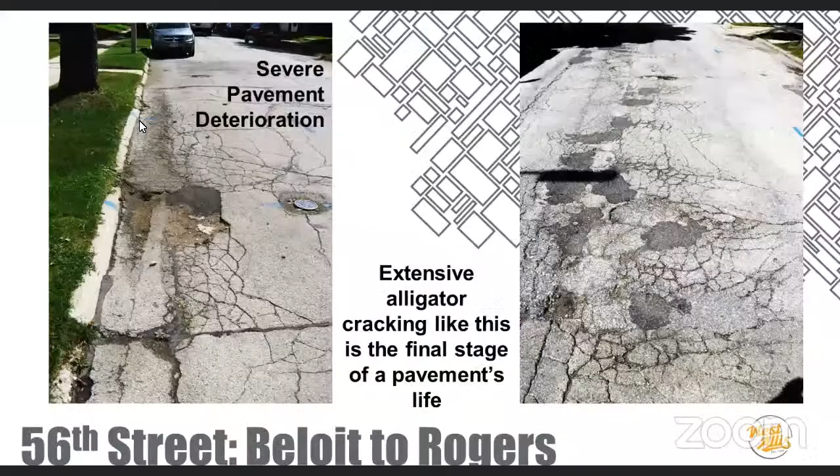Resolution to confirm and adopt the report of the city engineer containing the schedule of proposed assessments for improvement of South 62nd Street from West Washington to West Greenfield Avenue and South 56th Street from West Beloit Road to West Rogers Street by concrete reconstruction with miscellaneous walk repair, storm sewer relay, sanitary sewer relay, water main relay, building services, and utility adjustments. Thank you, and we'll turn things over to Pete Daniels.

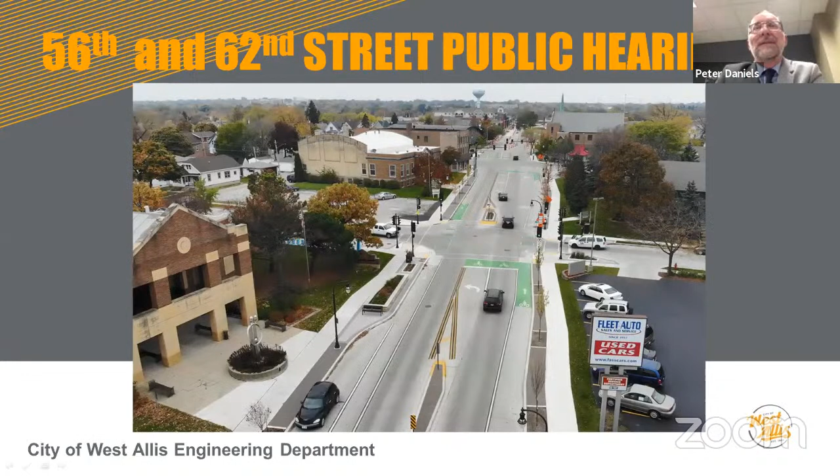Thank you, Mayor Devine. Okay, this is the hearing for 56th and 62nd. Here are the limits for 56th Street from Beloit on the north to Rogers on the south. We're kind of jumping over the top of Burnham, but there is some sewer work that will go through there.

And then the other one, 62nd Street from Washington to Greenfield. We're not getting into the Greenfield intersection, and actually Madison is new, so we're jumping over the top of that, but we're doing those 2 blocks.

This is a picture of the concrete on 56th Street that was put in 1927. This picture was actually taken in 1949, so at this point the road was only about 22 years old. At this point, the road is now 94 years old.

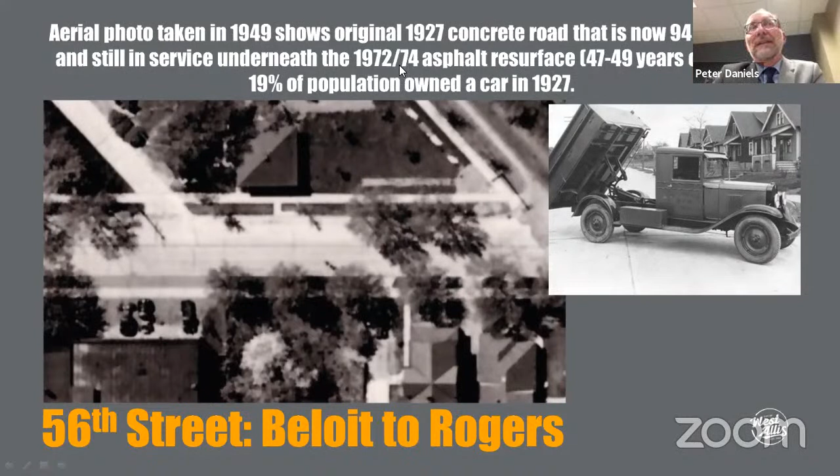That concrete that you see in this picture is still under there, and there is a layer of asphalt from 1972-74 that's now 47, 49 years old itself. So I just want to stress, this pavement that you see from 1927 is still there.

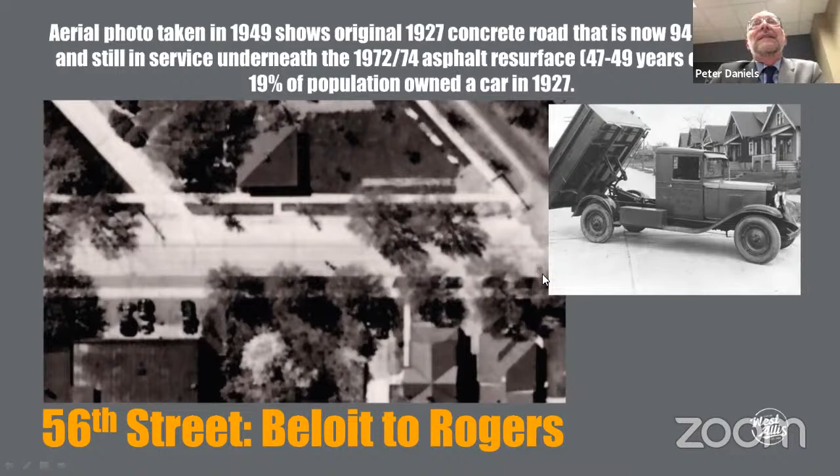Just as a point of reference, only 19% of the population on this street probably even had a car in 1927. And if they did, it probably looked something like this.

So here's some pictures from 56th Street. This is the alligator cracking that I talk about so often, the potholes. This road is just beyond any kind of maintenance that could be done. It's tedious to try and maintain, it's impossible to try and fill all these cracks. So this road is completely gone.

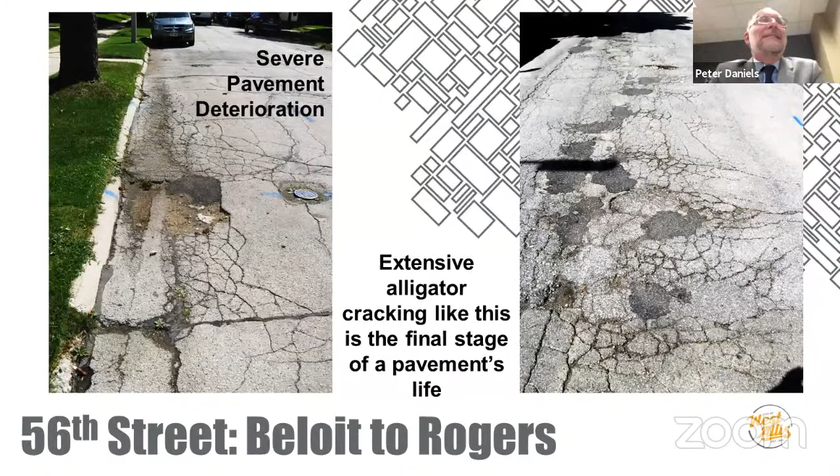But this road was built in 1921, so it's 100 years old officially. It's in its first 100 years right now, and it's still in service underneath the 1971-1972 asphalt resurface that was put in, which is 49 to 50 years old itself. Only 10% of the population owned a car in 1921, so most people were probably riding the trolleys at that point.

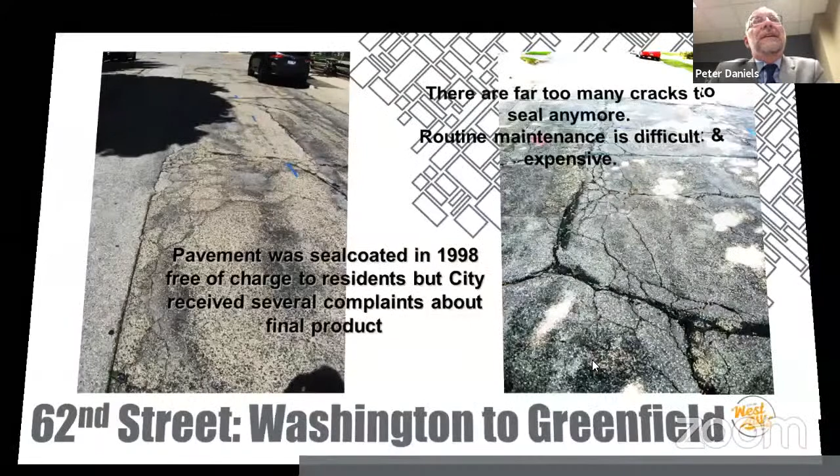Here are some pictures from 62nd Street. There are far too many cracks to seal anymore. I was the inspector in 1998 out here when we actually seal coated these roads to try to fill the cracks, so that was over 20 years ago.

We can't seal all the cracks anymore. This road is beyond repair. The seal coat that we did in 1998 was not very well received because it's very sticky, and a lot of people tracked the tar into their carpeting, so we don't want to do that again.

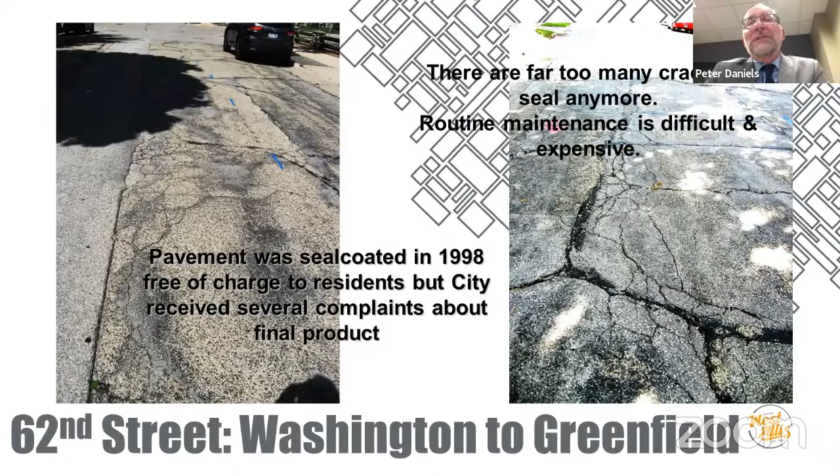And the sewers, as you'll see in the next slide, the sewers are... well, here's a picture of what the road will look like: the new concrete pavement, new sidewalk, new driveways.

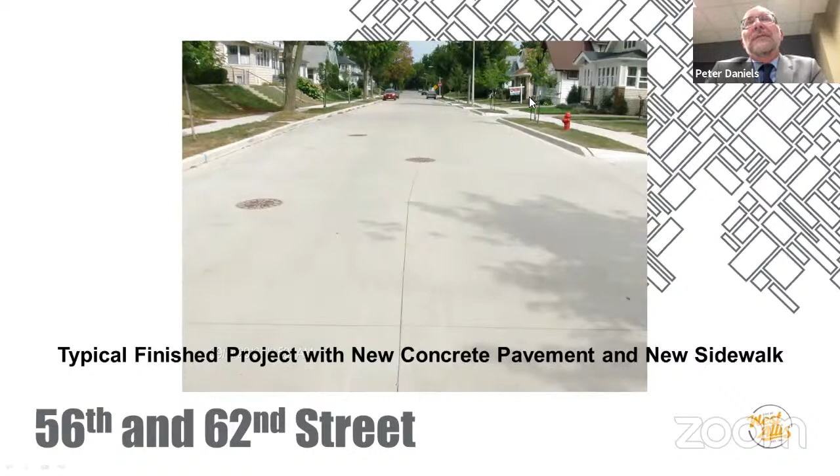The sewers are also well over 100 years old. So we're going to put in all new water main. The existing water mains are from 1909 to 1912, so they're 109 to 112 years old. This is actually a plan of the water main on 62nd Street, signed by the very first city engineer, Fred Schneider, in 1909.

We're also putting in new copper water service up to the curb, up to the water box. So the public portion of the water service will be replaced, and the lead will be replaced with copper. I'll talk a little bit later about replacing the rest of the lead from there to the basement. That will be an option later this year.

We're putting in new storm sewer and laterals. Most of these streets don't even have storm sewer. That will become important when I talk about the sump pumps in the future.

And then we're putting in new sanitary sewer. The existing sewer is also from 1909 to 1910, so it's 111 to 112 years old. Initially they said sewers would last about 75 years, then they said 100 years. We're well beyond that—we're on borrowed time on how long these things can actually last. A lot of them are collapsing at this point, so they need to be replaced.

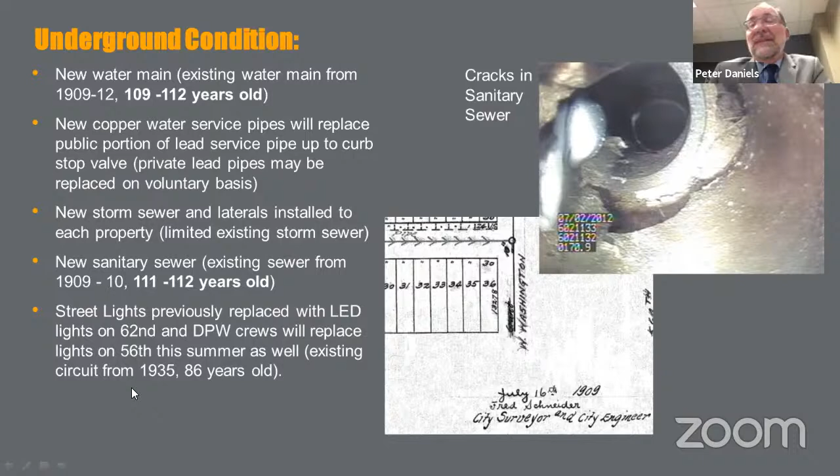The streetlights on 62nd Street have already been replaced. DPW did that last year, so they already have LED lights, which will stay. 56th Street will also be getting new lighting. DPW is going to do that circuit. The existing lighting is from like 1935, so it's also about 80-some years old.

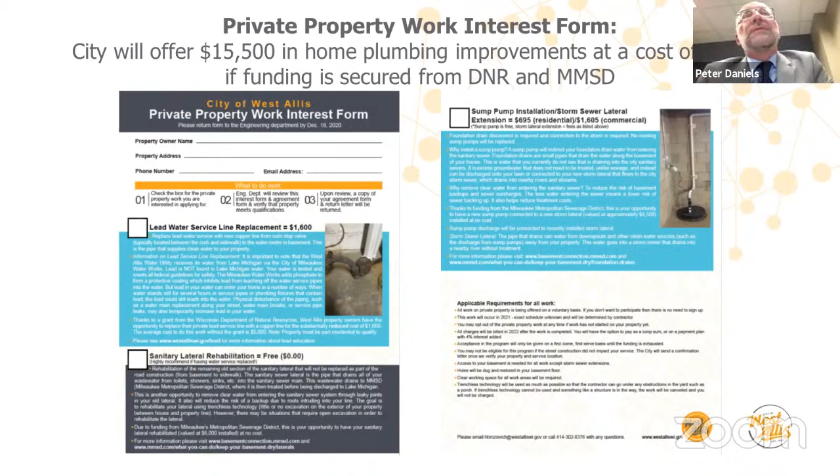So as I was alluding to, once we replace all the sewers in the street, all of these residents will be eligible for the work from the street to the basement. You'll be getting information in the mail later this year, probably not till like November or December. You'll get a form like this and you'll have check boxes. You can choose to replace your water service, replace the lead with copper. You can choose to have your sanitary lateral lined to give it strength and keep the roots out. And then you'll also be able to choose to have a sump pump installed.

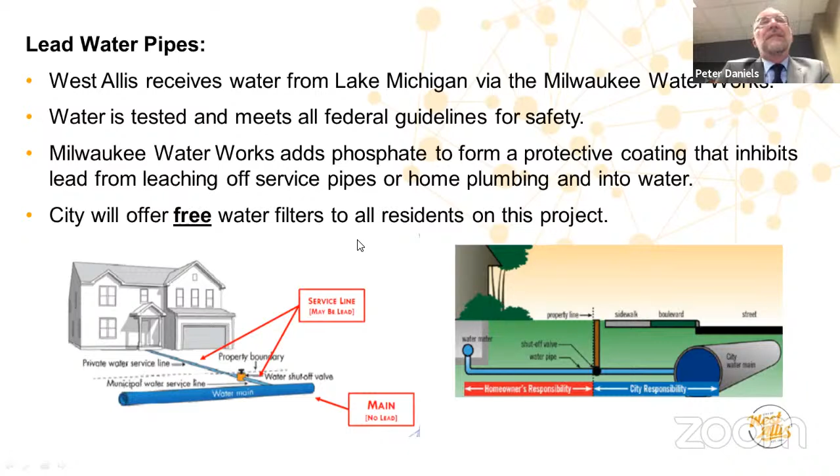I'll give a little more information about each of those. I just want to stress, as far as the water service, the water is safe. It comes from Lake Michigan, and the Milwaukee Water Works treats it with phosphate so that the lead pipes are not touching the water at this point. That's been very effective at keeping the lead out of the water. But during construction, some of that phosphate could be shaken loose. So we will be offering free water filters. If you give us a call, we'll drop off a Brita-type free water filter that you can use during construction, and you can keep it as long as you like.

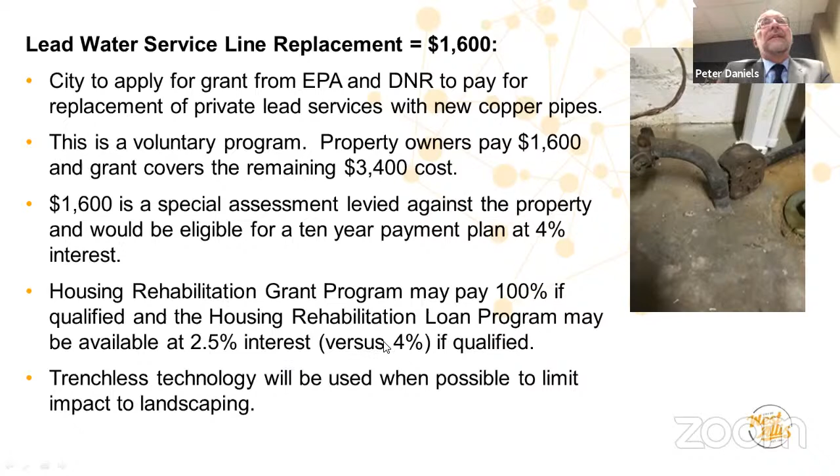There is a fee for the water service plumbing work that I'm talking about. There will be a $1,600 fee that will come later. That's voluntary—you can choose to do that or not. The actual work costs more like $5,000, but the residents are only paying $1,600. We do have housing programs available if you don't think you can afford the $1,600, so give us a call and let us know. We might be able to give you a loan or a grant to pay for that $1,600.

Then I also talked about the sump pumps. MMSD is offering free sump pumps to get the rainwater out of their sewer system. There is a $695 fee to extend the pipe for the sump pump to discharge into, but otherwise the rest of the sump pump, which I believe is like $4,000, would be free.

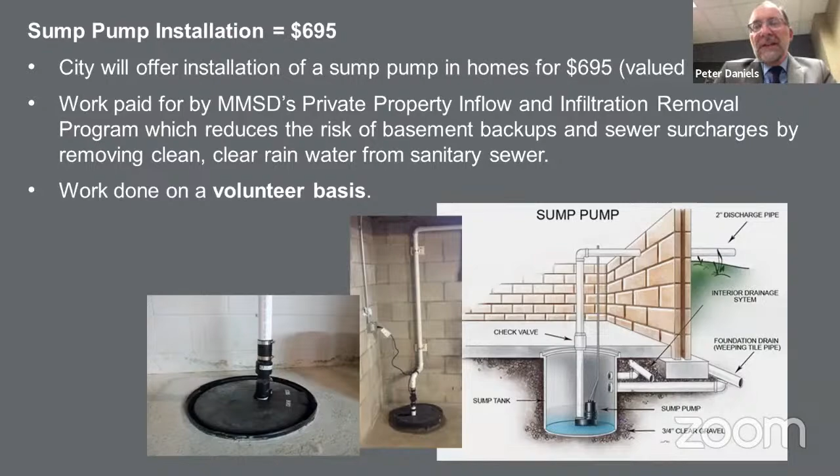So these are all programs that these residents will become eligible for. They're not eligible for now because we have to replace everything in the street first. The rules of the program from the DNR and MMSD are that the city has to do their work first, and then they will help pay for the rest of the work to go to the basement. But you'll get more information about that later.

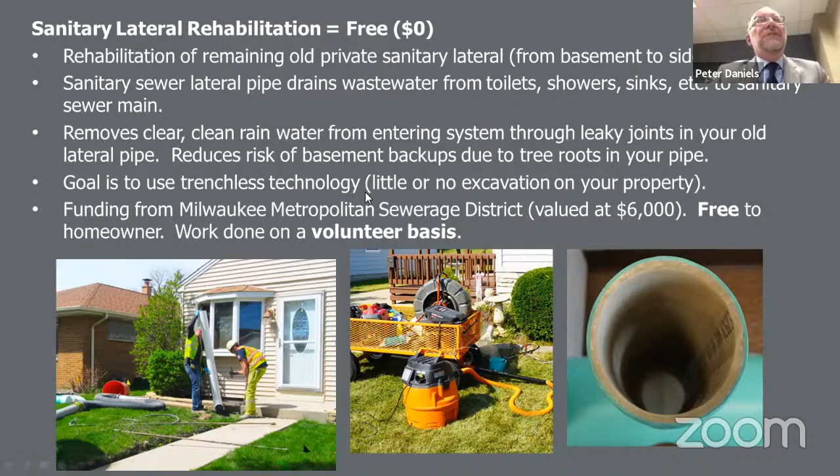So back to the main project in the street: the pavement is going to be about $800,000. The sanitary sewer is about $1.1 million. Storm sewer is $500,000. Water main is $676,000. So it's a $3 million job. Like I said, the streetlights were already replaced on 62nd, and we will be replacing lights on 56th Street—that's an additional cost that I don't have right now.

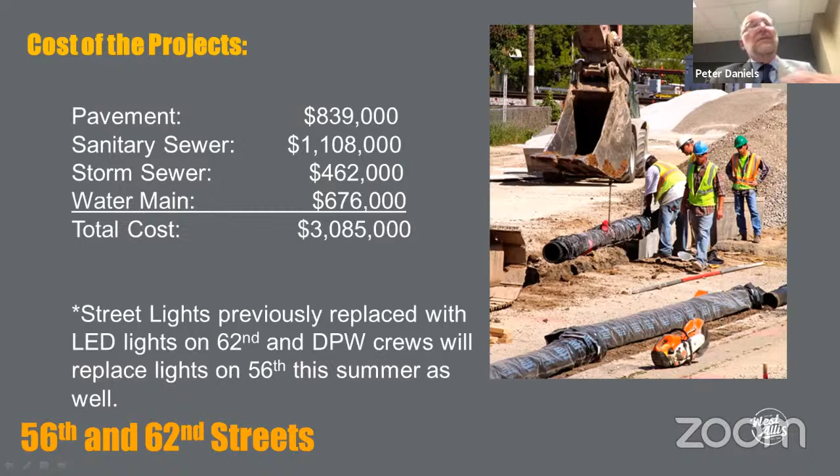Here is a sample assessment. The lots on these streets are a little bit smaller, 30 feet, so the assessment rate is $62 per foot. The cost to the homeowner is about $1,866. If you had a driveway, there would be an additional charge for that.

The estimate you got in the mail is not a bill. You don't have to pay that now. The bills will not go out until March of 2022 — more than a year from now. And if you sign up for the 10-year installment plan I'm going to talk about, you wouldn't make your first installment payment until December of 2022, almost 22 months from now, almost 2 years, before you'd actually be making your first installment payment. Hopefully COVID will be over by then and everything will be back to normal.

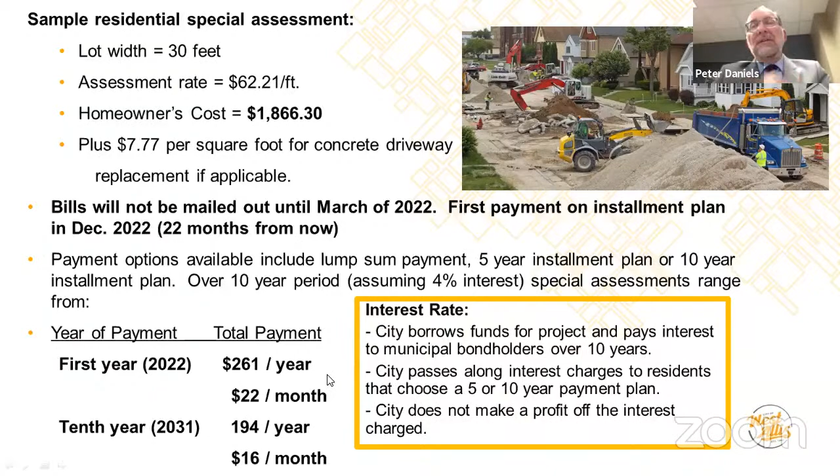Your first payment in 2022, for the whole year, would be $261 — that's $22 a month. Your 10th year payment in 2031 would be $194 — that's $16 per month. So it's very reasonable over a 10-year plan.

Why do we special assess? For over 110 years, the city has special assessed city property owners who have historically paid — back when these streets were built in 1921, the property owners paid 100% of the cost. This time they're only paying 8% of the cost, $243,000 in special assessments. Why? Because the residents on the street are enjoying a unique benefit that the rest of the citizens are not — you're getting a new street that's unique to you. That's the basis in state law for how we can special assess property owners, because they're getting something nobody else is getting.

The assessment rate is $62.21 per foot for all residential properties anywhere in the city, no matter how wide the street is, how high the traffic volumes are, or how high the actual bid prices are. Everyone is treated equally — everyone pays exactly $62.21 per foot. For over 110 years, Wisconsin has had this law allowing special assessments, and there have been at least 100 court cases I'm familiar with where judges have ruled that this law is a fair and equitable way to recoup the costs. It's been around a very long time and has stood the test of time.

Another reason we special assess is that it's the only way to ensure tax-exempt schools, churches, charities, hospitals, county parks, utilities, and even railroads pay their fair share too. No one is exempt from special assessments, even though there are 430 properties in the city that don't pay any property taxes. Many of these tax-exempt schools, churches, hospitals, and especially county parks are very large properties, encompassing about 28% of the city's land area that's not paying taxes. So they don't contribute to the city's cost except through special assessments in many cases.

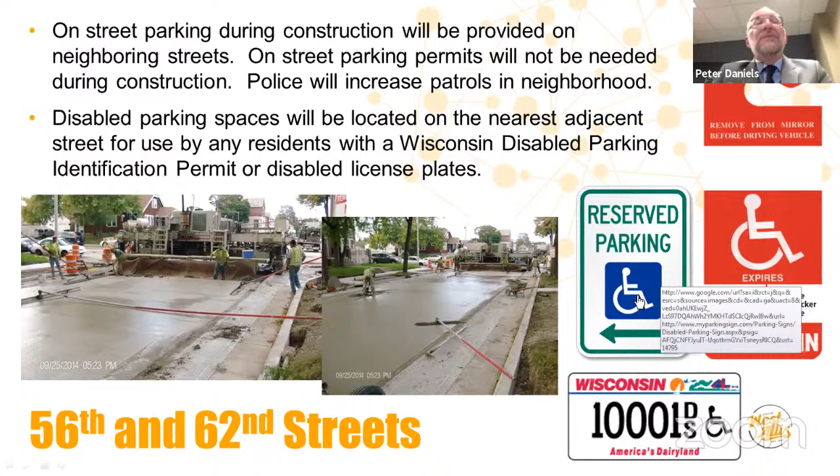Oops, things just went wacko. What happened? I'm sorry, that hasn't happened before.

We're almost done, here we go. This is the schedule. We're going to start advertising for bids on March 12th. We'll have the bid opening on March 31st. We don't get to pick who the contractor is—it'll be the low bidder by state law.

We Energies has told us they're going to start putting in new gas main work, which you see here, on about April 1st. They're going to take about a month. In the meantime, the council would hopefully award the contract on April 7th. And hopefully, if the weather permits and We Energies gets done and there's no snow on the ground, we could get going in May, and then we would definitely be done by October.

We haven't finalized the exact end date, but there would be a penalty, or liquidated damages, if the contractor was past that end date that we set. And the contractor would be bonded to guarantee that they would finish their work.

Then in January of 2022 is when we would start all that private plumbing work I talked about, the $13,000 in free plumbing work that you could be eligible for. That would be a separate contract because it would be done by a plumber, with different requirements. So that work could actually go on during the winter, but they would have to come into your basement to do a lot of that work. Just be aware of that.

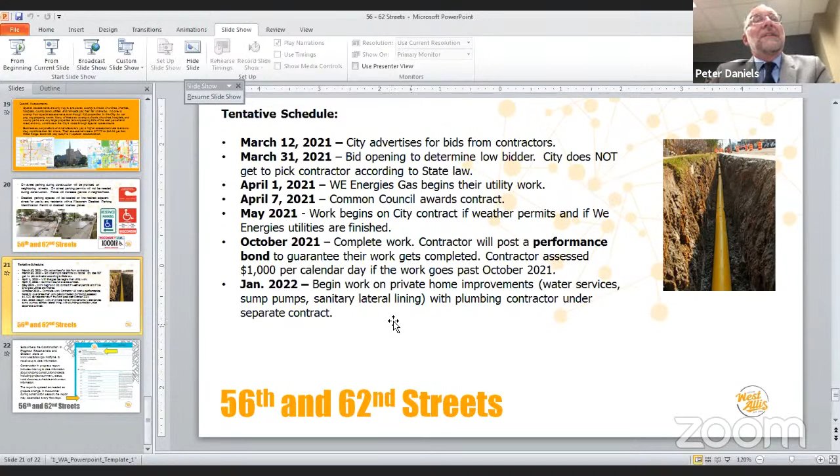Last slide: if you want updates on the work, go to our website—we have the Construction in Progress Report that comes out at least once a week and discusses all the projects, the status, what's happening next, and who to call. If you sign up for that on our website, about 10 items down, you'll get emails right to your house telling you what's happening next week or this week. So that's all I have—any questions?

Thanks for the presentation, Mr. Daniels. Are there any questions from the Common Council on public hearing number 1?

Okay, hearing none. Can you hear me, Mr. Mayor? Nope, there was somebody talking while muted.

Alderman Vitale: Pete, I'm delighted that finally we've seen some of those proposals to reconstruct some of those streets, like 56, even 57 between Beloit and the track—it's very much needed, probably the next round to reconstruct it as well. So I'm glad the proposals are there; they really need to be done. The curbs are shot, and I really wish that once the project begins, everyone agrees to have the sump pump installed and connect the lateral with the sump pump to the storm sewers. I think the cost is a lot, but really it's not much for the percentage a homeowner will pay. To me, that's a great idea.

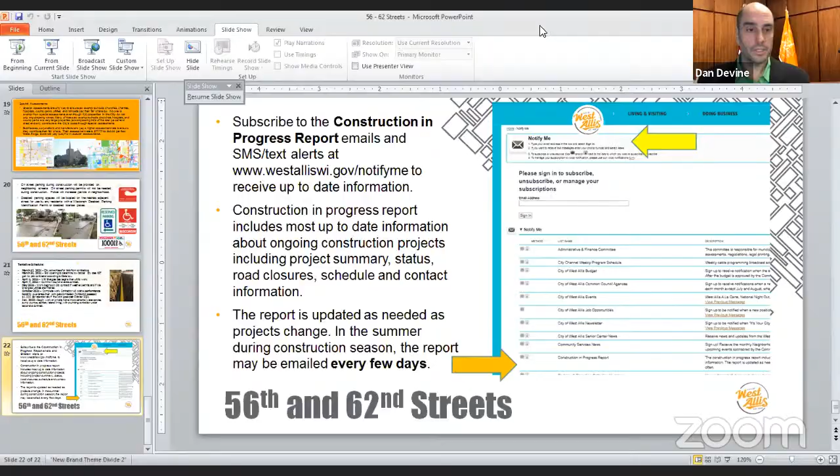Hearing none, I would just ask our clerk: have we received any written comment on any of our public hearings this evening? No, we have not. Okay, thank you. So with nothing from the public, we will close public hearing number 1, and I will ask the clerk to read public hearing number 2.

I'm sorry, I just found a resident comment for Oh, 62nd in Washington. Yes, from Amy Bedrano. She's a resident on 62nd in Washington.

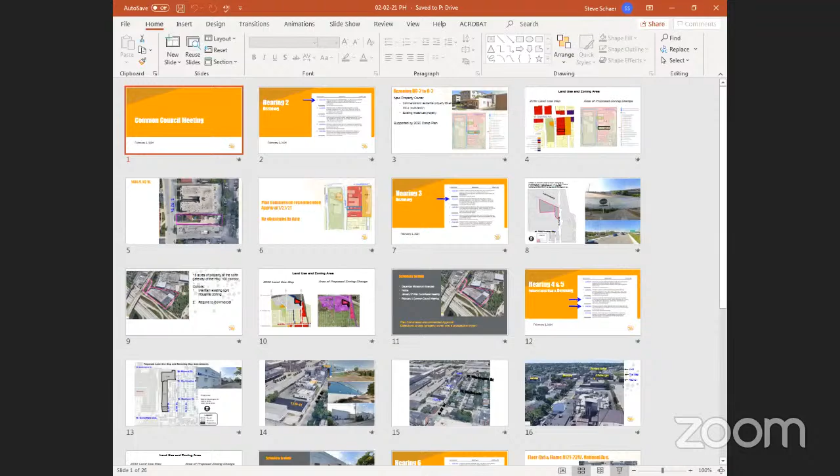She has a comment regarding the payment plan. I understand the need to repair the sidewalks and agree it should be completed. However, especially in the time of a pandemic, I do not feel most residents, including myself, have extra funds lying around for this expenditure. I see there is a proposed payment option which seems fair except for the interest rates. It does not seem right that we will have to pay 4% interest for a project we did not all propose. I am all for reconstructing our neighborhood, but do not think we should have to pay interest for this payment plan, especially not at a rate in excess of the current prime interest rate of 3.25%. Thank you in advance for addressing this concern.

Thank you, and thanks to Ms. Pedrano for her comments. One thing I just wanted to add to the discussion is that if she is able to find rates that are better from another source, we've always encouraged that. And I just wanted to ask if Mr. Daniels is still on the line. Yes. I know you said it during your presentation, but the bills won't be sent out until when again?

December. The bills will be sent out in March of 2022, but if you choose the 10-year installment plan, which is what she's talking about, your first payment wouldn't be until December of 2022. And yes, we pay interest to the people we borrow the money from. So we have to pass that along to the people that choose the payment plan in order to be fair to the people who are paying it all off at once. They don't incur interest. So since we're not getting our money for 10 years, we have to pay interest. They have to pay us interest. We're not making a profit off of that interest. That's what we're actually paying our bondholders, with some overhead included, but that's what we're paying our bondholders for the bonds.

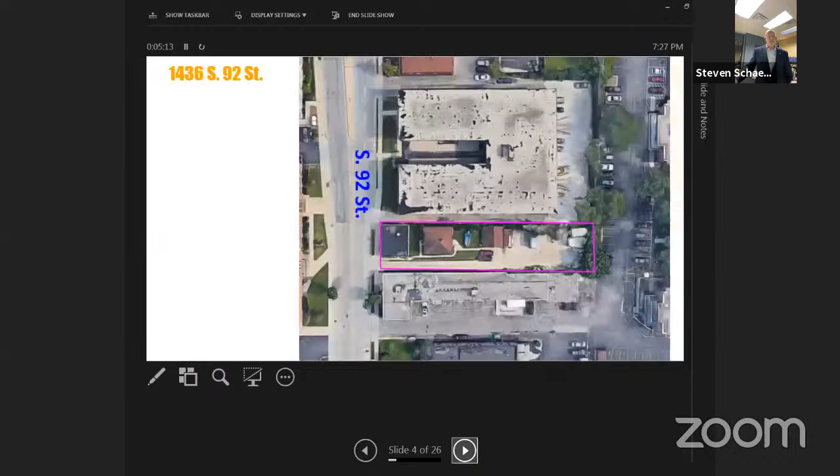So planning is in support of the zoning change, and it went to Planning Commission last month on the 27th. Planning Commission recommended council further the rezoning. That's why we're here tonight for the public hearing. Property has been noticed. Properties within 200 feet have been notified, and it's been posted in the city's official paper. Received no objections to date, and that concludes my presentation.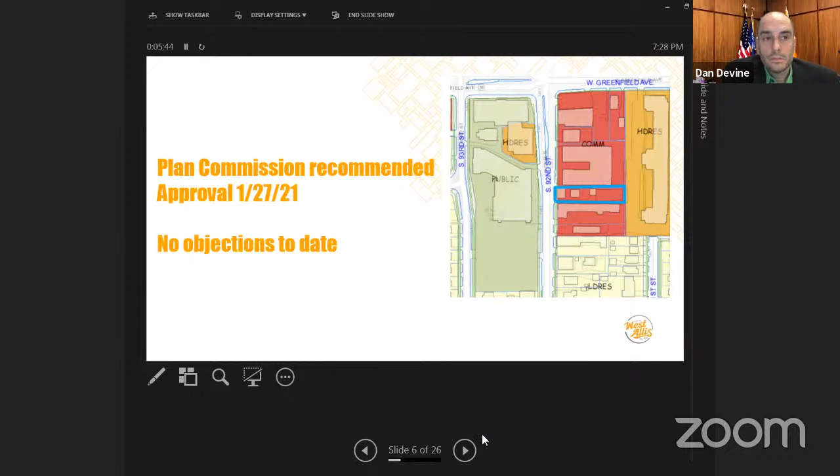Thank you very much, Mr. Schaer. Are there any questions on this item from the Common Council? Okay, hearing none, I'll just ask our clerk to give her the running leeway to interrupt me if we get any public comment on any of these public hearings coming up.

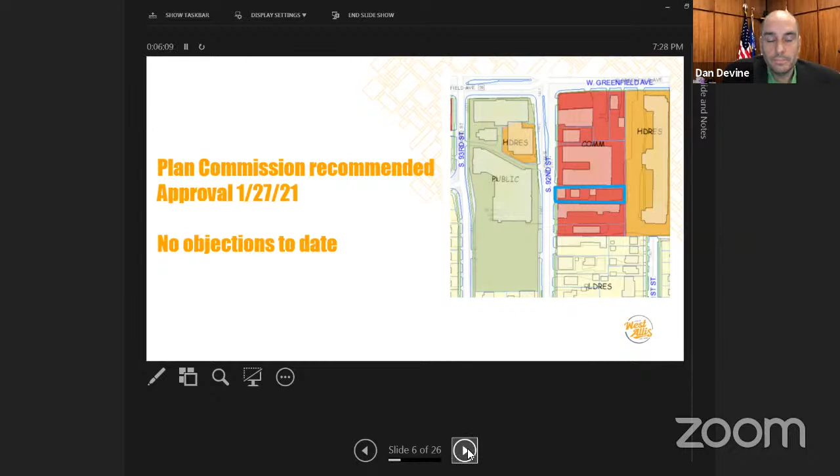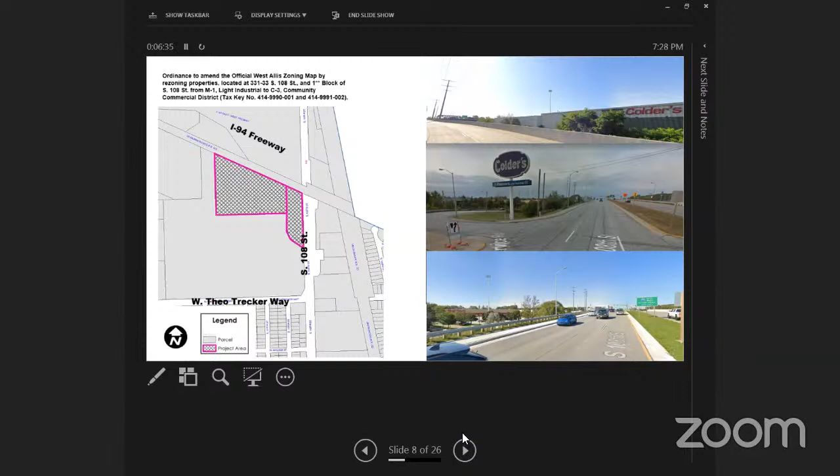Assuming we have not heard any on item number 2, I will close public hearing number 2. And I will ask our clerk to read out public hearing number 3: Ordinance to amend the official West Allis zoning map by rezoning properties located at 331-33 South 108th Street and 1st block of South 108th Street from M1 Light Industrial to C3 Community Commercial Districts, tax key numbers 414-9990-001 and 414-9991-002. Thank you, Mr. Schaer.

Thanks, Mayor. This is a proposed rezoning of property which includes the Colders property, a 12-acre parcel off of Highway 100, and also a city-owned parcel or city-controlled parcel which provides access to the Colders property as well as the Hank Aaron State Trail. It's located at the intersection of I-94 and 108th Street, Highway 100, just north of Theo Trecker Way.

So the city's main charge here is basically to align this property with the plan, which calls for a commercial land use on both of these sites. And as zoned currently, it's light manufacturing or light industrial. You see some of the just proximity in the pictures on the right-hand side.

The top photo is of the view from I-94 at the off-ramp. You can see Colders, and then down below the Colders sign, that's the city's access road leading down to the Colders site. The picture on the very bottom is of some sight lines into the Colders property. While there is a significant tree canopy on this site, and it is lower below that of the elevation of Highway 100, it is still visible from Highway 100 as well as the interstate.

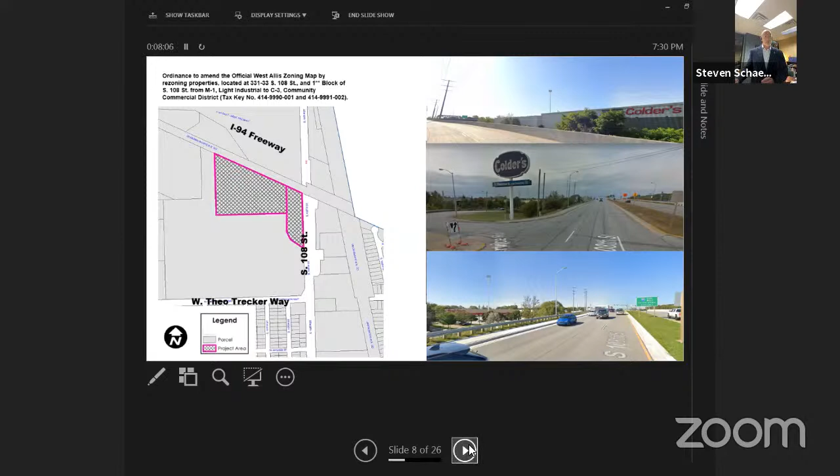What's prompted tonight's public hearing has been a series of moratoriums that have taken place over the past couple months, going back to October, when Crete Trucking had made a proposal. They're a prospective buyer of this site. They made a proposal to the city to develop their trucking company, their corporate headquarters, and parts and showroom for truck sales at this site back in October. That was just a presentation to the council to express their interest in the site. The same night, council also wanted a little bit more time to evaluate not only the Crete proposal, but that of the rezoning effort and aligning with the comp plan.

So moratoriums were put in place and extended, and this is sort of the culmination of all that. Our planning division shares the various options that are out here. So for this 15-acre parcel, the 3-acre city parcel plus the 12-acre Colder site, there are 2 options: maintain the existing light industrial zoning, or rezone it to a commercial C3 zoning district, which would align with the 2030 comp plan.

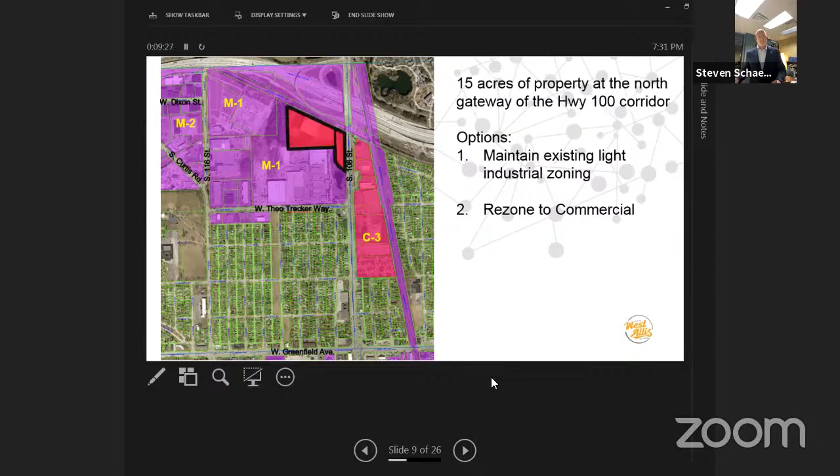And this is the area here, the aerial view of that property. Basically, the Highway 100 study calls for alignment with the comp plan, as well as encouraging, along this corridor, a more dynamic, diverse mix of uses. The light industrial district, while it does allow certain commercial uses, its main intent is to provide a platform for manufacturing uses.

Warehouses, self-storage, shops, and other sort of industrial uses. Whereas the commercial zoning district, as staff is recommending, would promote mixed use apartments, residential uses, hotels, and other destination type of uses.

Given the proximity and location to the Zoo Interchange, the zoo itself, the city of Wauwatosa, Waukesha County, it's poised for, potentially, one of the top 5, maybe even top 10 locations within the metro area. So we're looking at this as a real opportunity.

We don't want this to be an opportunity lost where we could have had this or could have had that. We really want to take a look at this site and think about it as a major focal point within this area, with over 1,200 feet of frontage along I-94 and another 700 or 800 feet along Highway 100. It's a prime location, and we think the commercial zoning would best suit not only what the comp plan recommends, but would also help us further evaluate this site with the owners of the property and properly market it for a higher and better use.

So this is just a slide showing the 2030 land use map on the left, as well as the zoning map on the right. You can see the comp plan from the land use map shows a commercial land use, and that's the direction staff is recommending for the zoning as well.

Thank you very much. Are there any questions on public hearing number 3 from the Common Council? Mayor Devine, Alderman Rote.

Steve, with this new rezone to C3, that would eliminate the Crete Company, correct? That's correct. If rezoned, while their office use is something that could work within a commercial zoning district, it's important to note that the Crete Trucking Company is not just a corporate office. It also has commercial truck sales, commercial truck repair, as well as warehousing, which is a light industrial use. So they would, in fact, need a light industrial zoning.

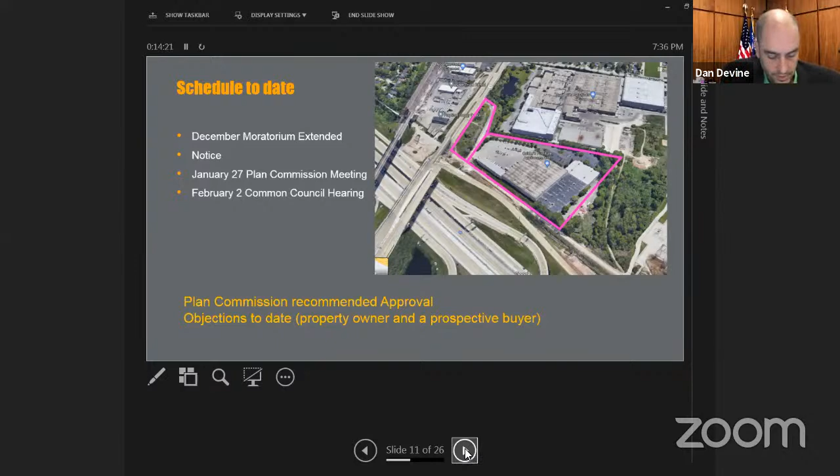And I believe hearings 4 and 5 can be taken together. If that's the case, I will ask our clerk to read those two out. Ordinance to amend the official West Allis zoning map, amending section 12.05 relating to the following properties: 6500 West Washington, 1323 South 65th Street, and 1339-1347 South 65th Street. And item 5, ordinance to amend the official West Allis future land use map within the city's comprehensive plan, Chapter 10 land use, from industrial and office to commercial land use.

Thank you. And we'll turn things over to staff. Mr. Schaefer.

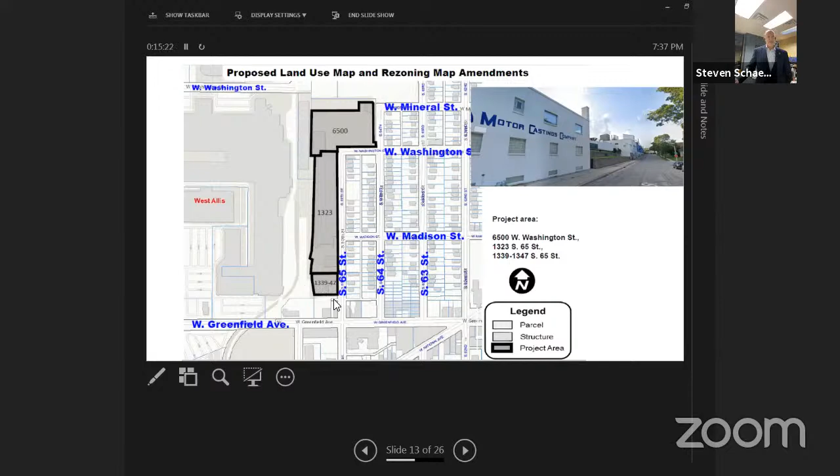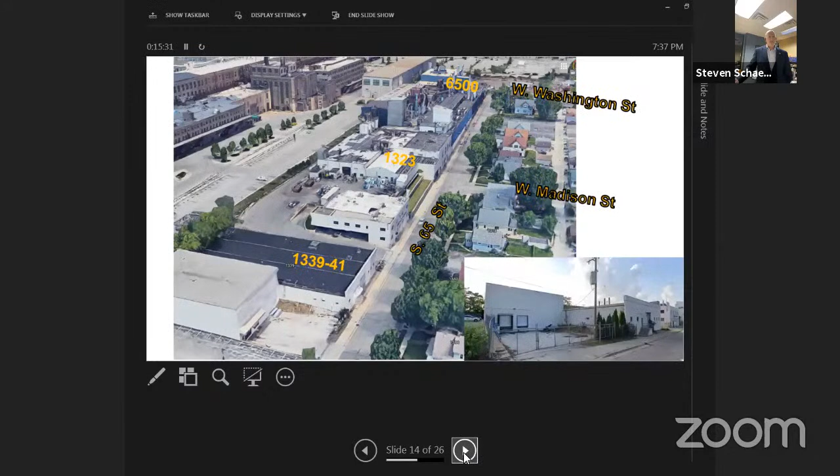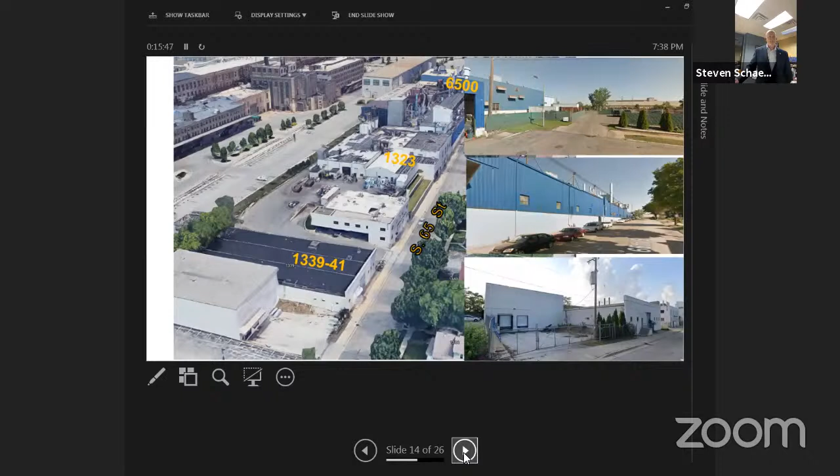Motor Castings property is comprised of three properties. On the very south end, the 1339 property, which is a warehouse. Moving further north along the site, you have the main office and foundry portion, which is in alignment more or less with Madison Street. Further north of that is their outdoor storage yard and the remaining extent of the foundry property. So those are the three properties that are currently zoned M1 light manufacturing.

This was clearly zoned light manufacturing—we recently created an M2 zoning district—but Motor Castings is no longer here, so they're gone. It's owned by a company out of Warsaw, Indiana, currently, and they are evaluating potentially demolishing the buildings, with perhaps the exception of the warehouse building in the far south at the 1339 property, and then looking for an adaptive reuse.

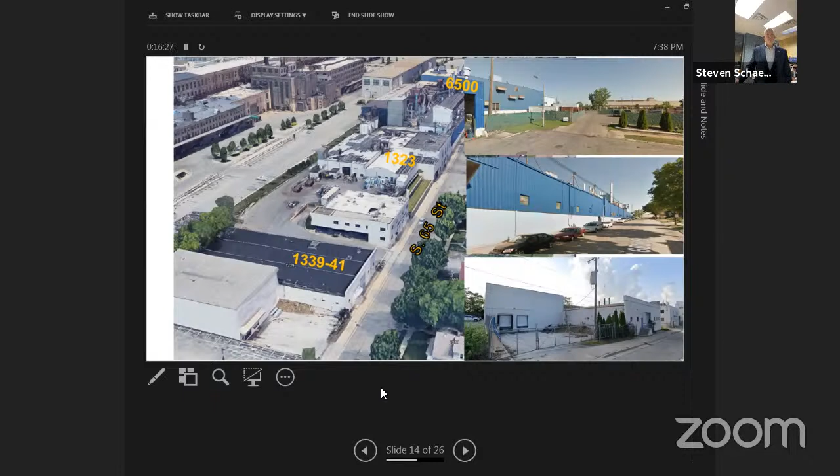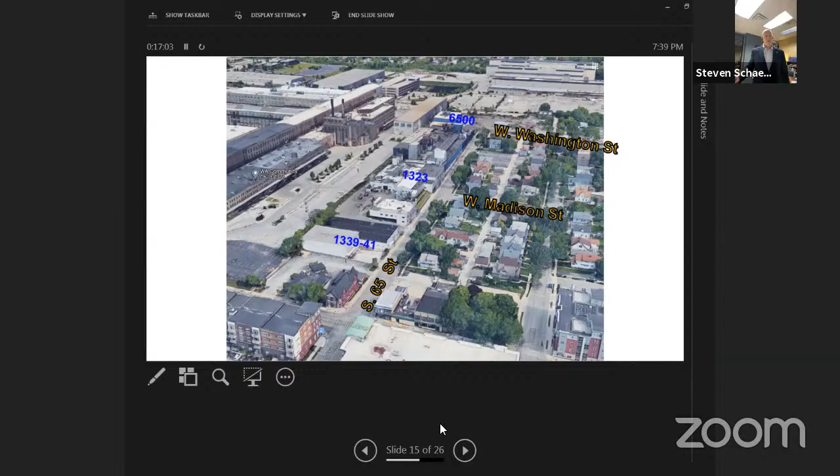So this is a perfect time to take a look at what could be, and it's not hard to see a lot of the improvements which the council has been instrumental in getting done around the area. Just to the west you have the Whitnall Summit properties, and to the south the Six Points neighborhood redevelopment. The 70th Street corridor—the future brings perhaps Allis Yards along the 70th Street corridor, farmers market a little further south. So there's a lot of synergy taking place within the immediate area over the past 5 to 10 years, perhaps even longer.

This property is really suited and in a proper location for what planning thinks is a rezone—to get it out of the M1 light industrial zoning district and take a look at C3 zoning, which is along Greenfield Avenue, where you have the Cousins, the Berkshire, and the Six Points apartments, all of the Mandel property, the farmers market area, the Reunion—all of that is more or less zoned C3 commercial. So this would bring that commercial zoning up north along 65th Street to potentially these three properties. In cooperation with the current property ownership, as well as our economic development team, we'd really like to explore some uses other than industrial for this site, and we think it's suited for just that.

On the left is the future land use map, and on the right is the area of the zoning change. You'll notice the zoning is M1, and the land use category is also industrial and office. So before the council would rezone anything here, we'd recommend that the land use be made consistent—or at least changed first to a commercial land use—and then the rezoning could take place from there and become commercial.

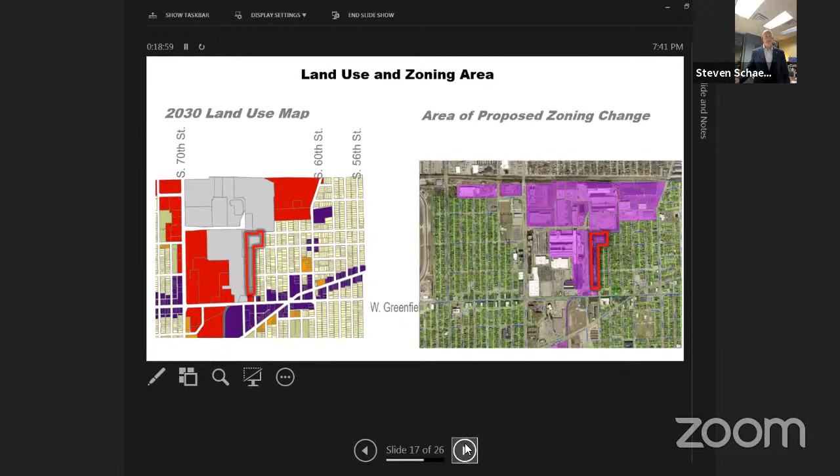The next slide is just a recap of our schedule. The moratoriums have been extended into December. There's been a period of public notice for both the future land use map changes as well as the zoning changes, and our planning commission has recommended approval on the 27th of January. So tonight's the public hearing, and there have been objections that staff has received to date. That concludes my presentation.

Any questions? Thank you for the presentation. Are there any questions from the Common Council? Mayor, Alderman Haas—so am I correct that what we're being asked to do tonight is to approve a change, but not to decide yet what that change will be?

Is that correct? Correct—the only change would be to the future land use map, to go from an industrial land use to a commercial land use, and subsequently rezoning from M1 light manufacturing to commercial zoning, C3 zoning. But we do not have an end user in mind, so there's not an apartment building or really any developer looking at this right now. This is setting the stage for that next step to come, and then marketing the site in cooperation with the ownership.

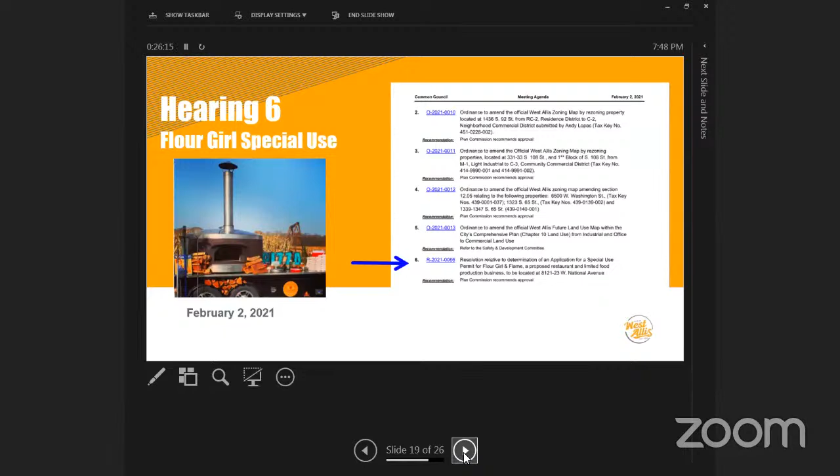Resolution relative to determination of an application for a special use permit for Flour Girl and Flame, a proposed restaurant and limited food production business to be located at 8121-23 West National Avenue. Thank you, and once again I'll turn things over to staff.

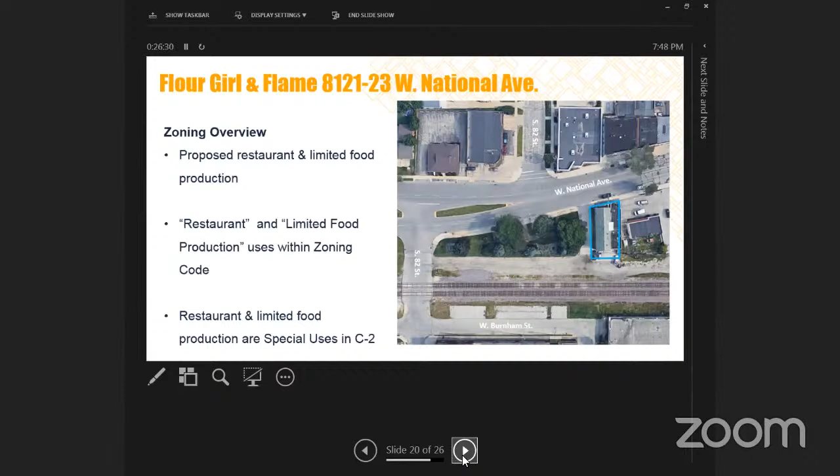Mr. Schaer: Thanks, Mayor. The Flour Girl is one of the executive chefs of Tall Guy and a Grill on 68th and Lincoln, and has started her own thing, working in cooperation with Tall Guy and Grill. They're looking at the site at 8121-23 National Avenue as a possible location for their food preparation and storage business. There would also be a retail offering for take and bake pizzas. Restaurants and limited food production are considered special uses within the C2 commercial zoning district, and that's the purpose of our hearing this evening.

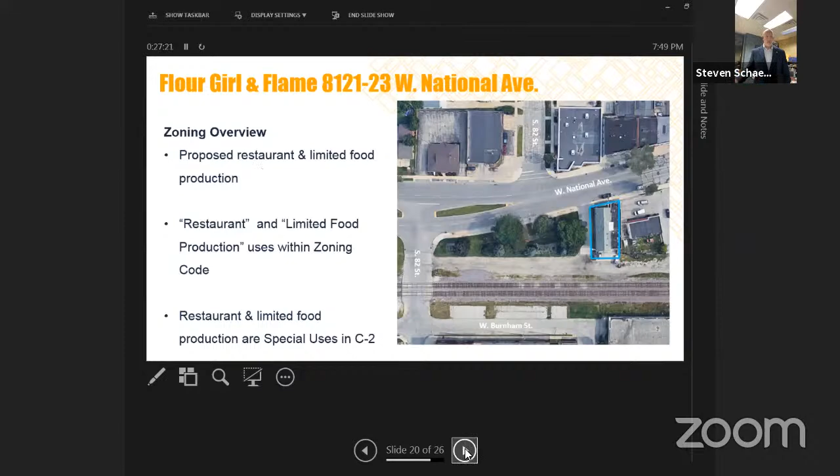So the Flour Girl and Flame business started back in August and became very successful, and now they're at the point where they're looking for some brick and mortar, in this case along our National Avenue corridor, for the new business offering.

The hours initially to start would be Wednesday through Sunday between 4 and 8 p.m. However, with the grant of the special use, the way it's listed, the hours would be between 7 a.m. and 10 p.m. daily, to offer some more flexibility should they grow and need more general flexible hours of operation.

The interior lease space is primarily just for preparation and holding of the food, refrigeration, cutting the mushrooms, and preparing the ingredients for the take and bake pizzas.

And so that brings us to the next point. The front entry, as you come into the building, would also have a retail area where you could select from the various menu items that they have, and then get your order and take it home and bake it.

They do have a wood-fired, mobile pizza oven, which would be going out to different farmers markets events throughout the community, not only our own farmers market, but different farmer market offerings throughout the metro area, basically promoting their products and selling pizzas.

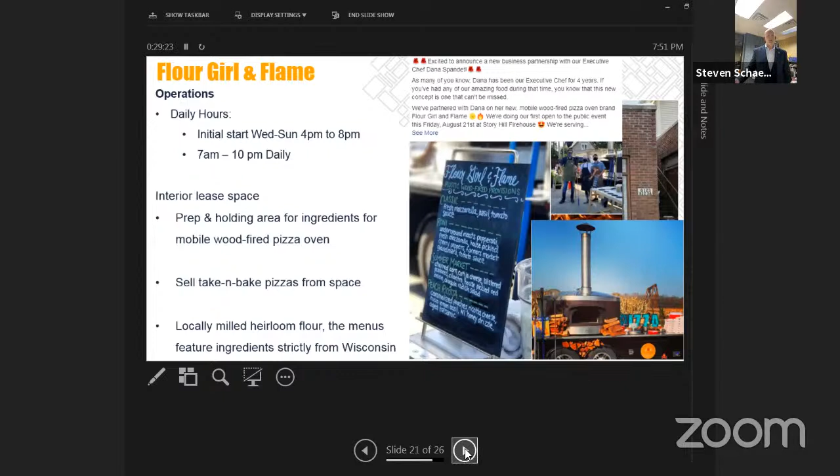They would like to talk about programming this park down the road, maybe later this year or in '22, with perhaps some community gardens to support some of their ingredients, as well as maybe a space for outdoor events for the community in the neighborhood.

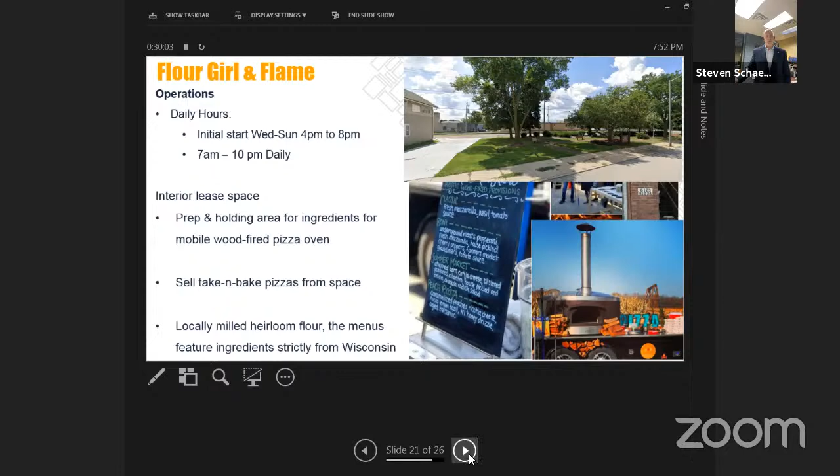So it's really just sort of a simplistic and small build out of the interior space with some equipment, refrigeration, and the retail space. But that will support 7 to 10 jobs for the West Allis area.

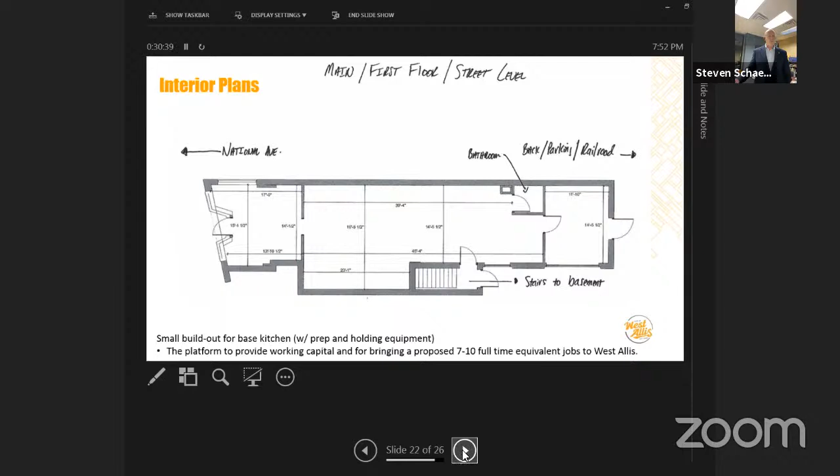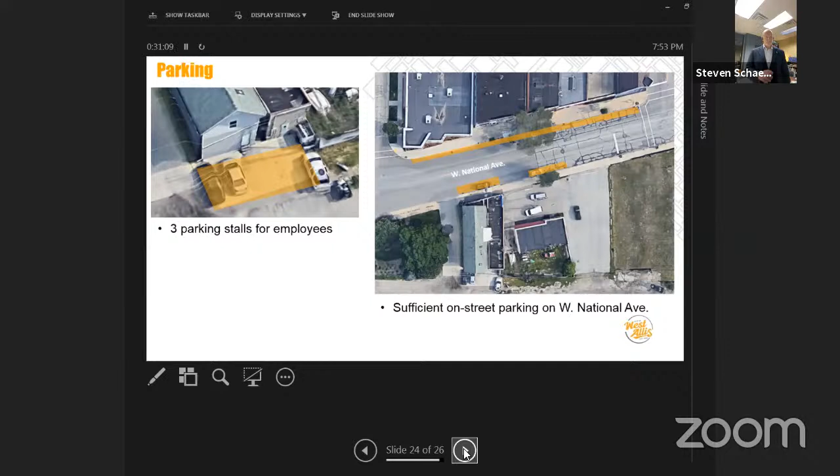Behind the building, there is space for parking. They'll have street parking, and we feel there is ample street parking along both north and south sides of National Avenue. A lot of the other businesses in the area are in sort of the same boat. They don't have a lot of off-street parking, being a traditional neighborhood area. Street parking is key.

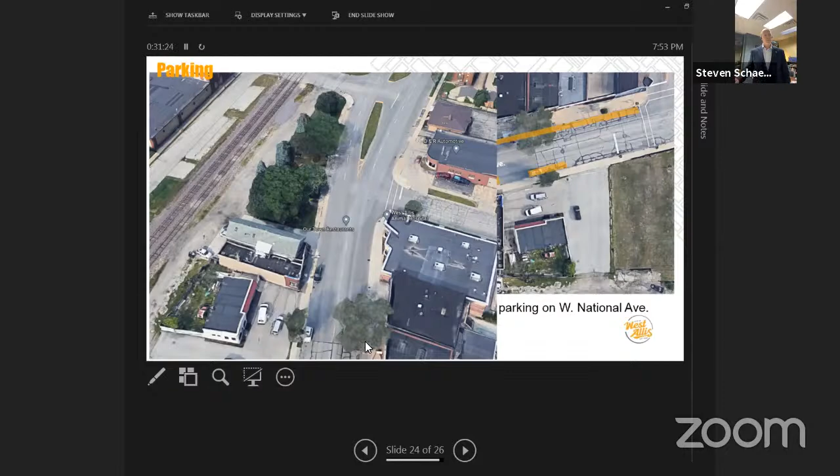There is an opportunity, though, not too far away. There is some municipal parking along the south side of the railroad tracks that is actually owned by the city, so that's perhaps an overflow area if need be. Our planning commission did recommend approval on the 27th, and have received no objections to date.

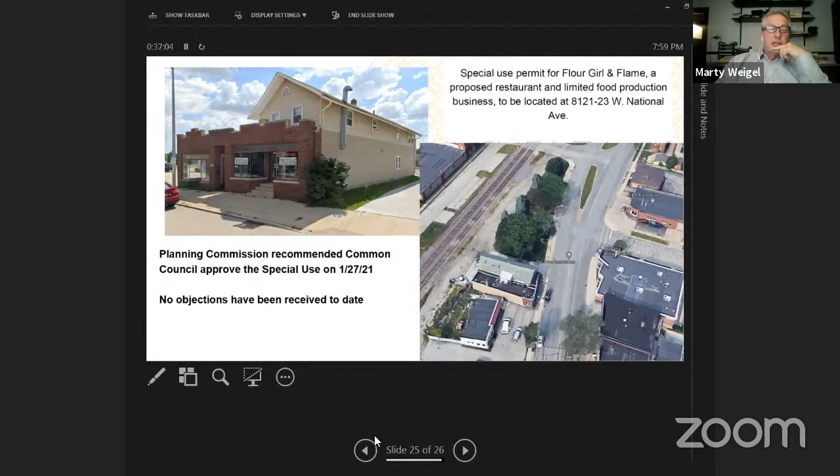Is it possible that someday we vacate that alley and give it to the property owner there? I haven't talked to Kevin McFadden, he's still a property owner there I believe. That might make it more useful for him. It looks like a pretty new alley though, and I don't know if we want to give away a brand new alley like that, because I think there might still be access along the railroad tracks on the south side of the building with that dirt alley back there.

That's another issue. Right now, we are not approving indoor dining, nothing's been shown on the inside yet as far as indoor dining, right? Yeah, this is purely take and bake. Yep, I'm all good with it. Okay, but thank you. Thank you, Alderman Weigel. Any other questions from the council?

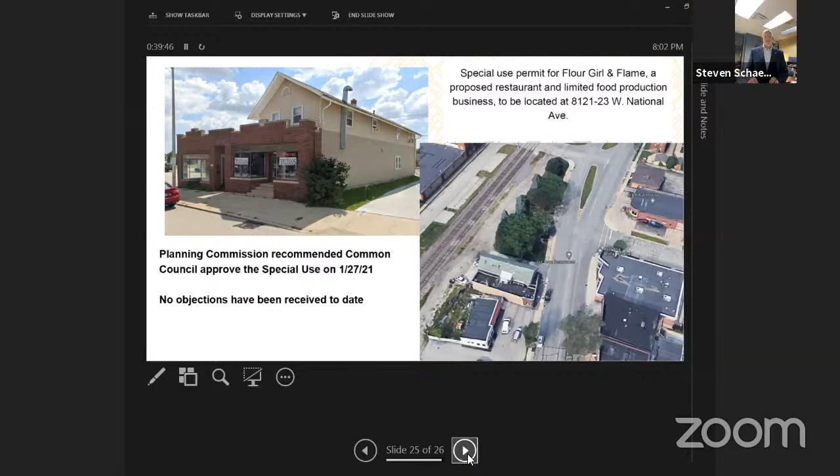Mayor Devine, Alderman Rowe, if I may just back up, since Alderman Reinke brought it up—Steve, you just said this developer is interested in properties to the west. That would be the railroad park, correct? I'm sorry, to the east. Okay, yes, the wrong direction. Thank you, Steve.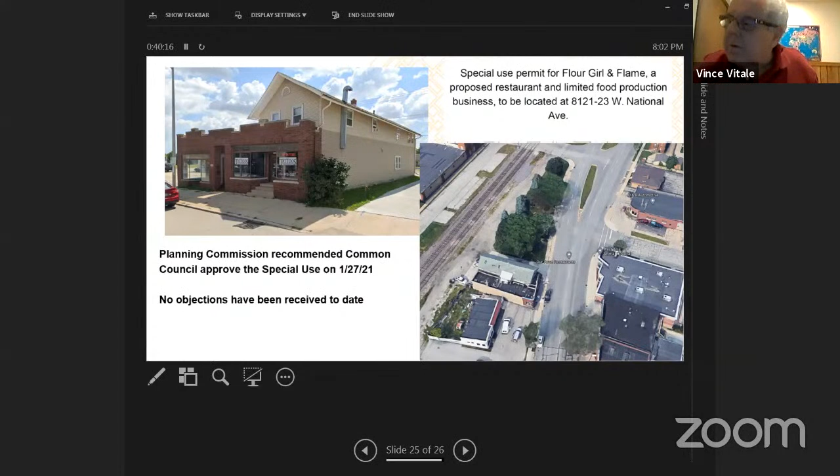I have a few things I want to touch on this evening. The first is to once again publicly thank our Public Works Department for the job that they all did in dealing with this storm the past weekend.

I believe this was the biggest snowfall we've had in about a decade. And I think we all recognize that we went to sleep and woke up and that snow was still coming down.

They worked through the night trying to keep the streets open, trying to keep commerce moving and getting people to work and appointments and things like that.

So I just really want to thank them, and I want to thank the community for their patience. I know that they put in a lot of long hours and really dealt with a lot of heavy snow that fell for probably about 13, 14 hours consecutively.

So they did a very nice job, and I got a lot of compliments. And I also want to thank the cleanup staff that dealt with a lot of the complaints that I know some of the older people and myself have also received.

The other thing I want to touch on is, although it really didn't get a proper grand opening due to COVID, I'm sure a lot of you are aware about our fitness court on National Avenue in Veterans Park. Well, we found out recently that each year the National Fitness Campaign does awards.